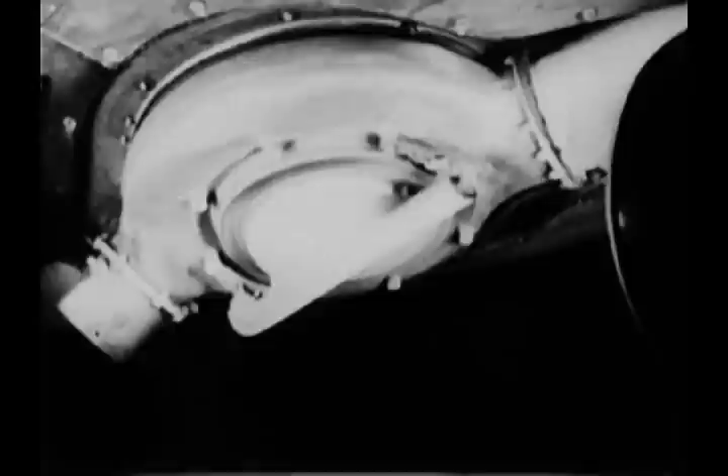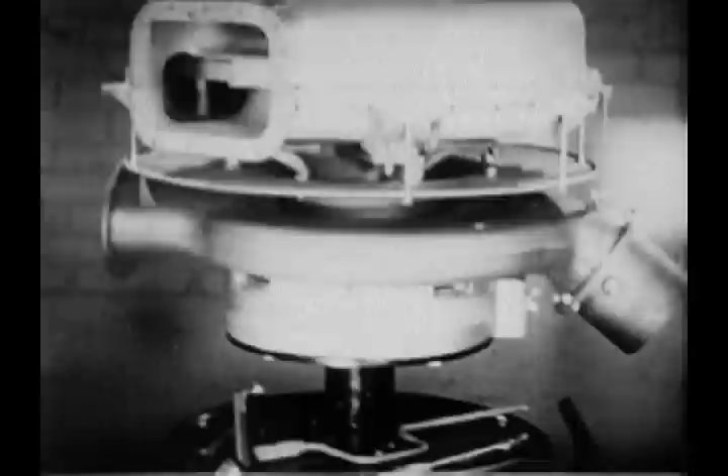This master of the skies, the dynamic turbo-supercharger, is the reason for our air superiority at high altitudes. For the year 1941, the Collier Trophy, one of the highest honors in aeronautics, was awarded jointly to Dr. Sanford A. Moss and the Army Air Forces for 25 years of collaboration in perfecting the turbo-supercharger, which is playing a leading role in sweeping our enemies to defeat.

The turbo-supercharger makes possible high-altitude flying with full engine power. An airplane engine derives its power from explosions of a mixture of air and gasoline. At altitudes above sea level, the air gets thinner and thinner. Therefore, these explosions get weaker and weaker. At 20,000 feet, an unsupercharged airplane engine gives but one-half its normal power. At 35,000 feet, only a quarter of its power.

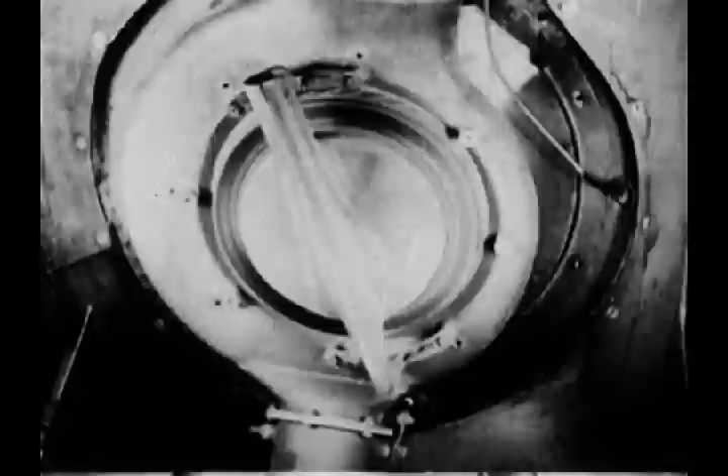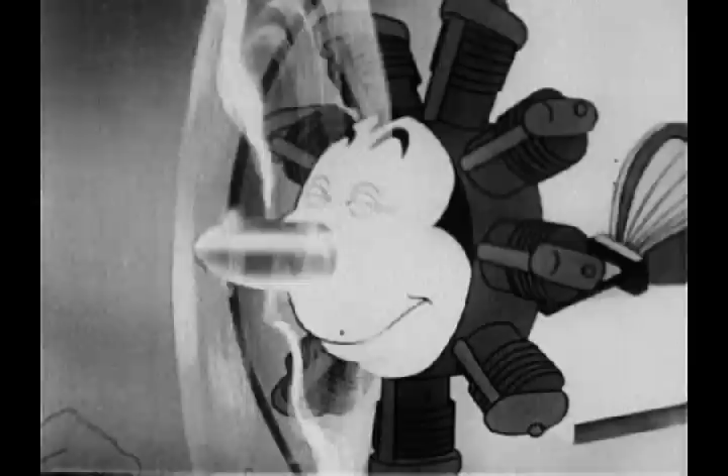The turbo-supercharger counteracts this loss of power by compressing and cramming air into the engine, thereby maintaining proper manifold pressure to give full power at high altitude. It performs the same service for engines that oxygen equipment performs for pilots, kidding the engine into thinking it is always working at sea level.

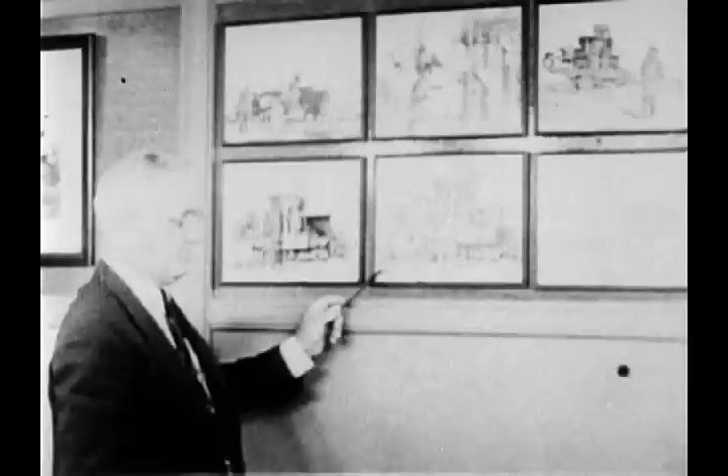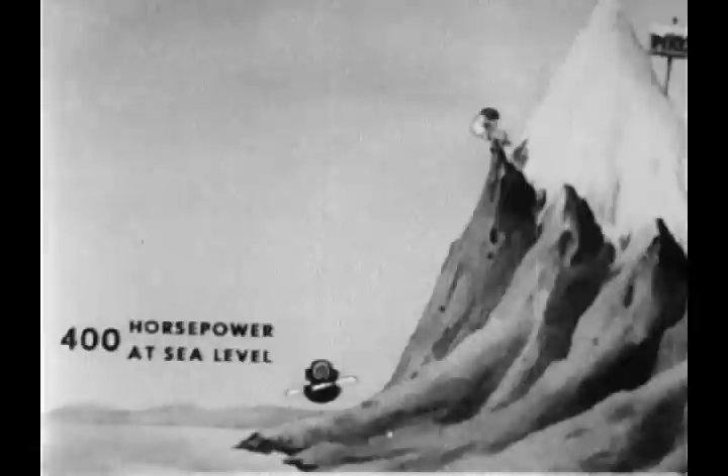Without a turbo-supercharger, the engine gasps for breath. During World War I, the first model turbo-supercharger was tested under great difficulty, on a truck at the summit of Pikes Peak, 14,100 feet above sea level. The Liberty engine developed 400 horsepower at sea level, but moving up

to 14,000 feet, it dropped to 265 horsepower. Then the turbo-supercharger not only boosted it up to 400 horsepower, but to 410, or 10 more than normal at sea level. The turbo-supercharger has demonstrated its worth in actual combat all over the globe.

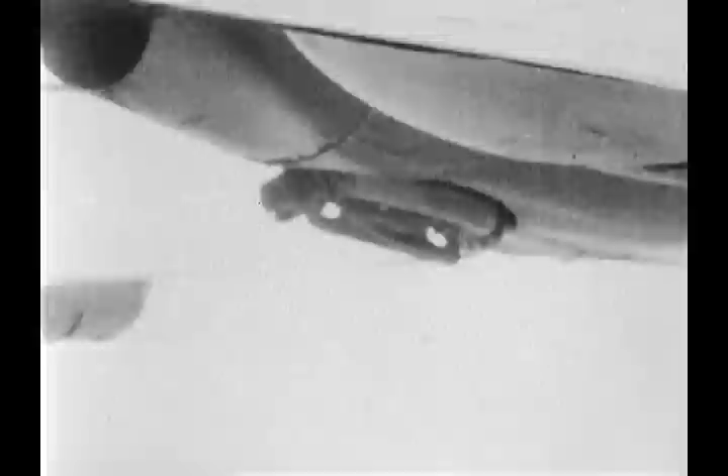Our great bombers, the Boeing B-17 Flying Fortress and Consolidated B-24 Liberator, together with the Lockheed P-38 Interceptor, the P-43 Lancer, and the deadly Republic P-47 Thunderbolt, are all turbo-supercharger equipped, which enables them to fly and fight effectively at great heights above the earth.

Our turbo-supercharged interceptors and pursuit planes can get on top and stay on top of anything the enemy has to offer. These tactical advantages are the key to air supremacy and ultimate victory.

Turbo-superchargers permit our bomber pilots to avoid bad weather, even storms, by climbing over them, making it possible to fly at altitudes and speeds which result in maximum engine efficiency.

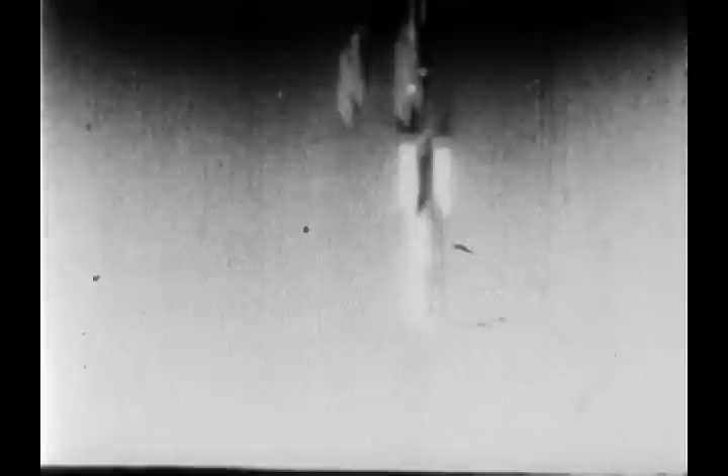Obviously, we have a decided edge when we can bomb the enemy with a minimum of danger to our planes and personnel. Flying turbo-supercharged planes, our boys have bombed enemy objectives with amazing accuracy from heights where they were invisible and unheard from the ground. There had been no warning sirens, no opportunity to take shelter, only the sudden scream and paralyzing crash of falling out of a clear sky.

Almost without exception, these planes have returned safely from their mission. Time after time, you have read of our big bombers returning unscratched from perilous raids in all theaters of the war. It is true that our heavy bombers have been in dogfights, have suffered casualties in men and planes, but in practically every instance, this has happened when planes were operating at levels below 25,000 feet.

Another reason we have to get up higher and higher is to get above the effective range of anti-aircraft fire, which has been reported even above 30,000 feet.

All combat planes are equipped with gear-driven superchargers, which are built into the engines and driven from the engine crankshaft. These geared superchargers are effective up to medium altitude. At high altitude, the turbo-supercharger is needed to provide additional pressure to maintain full engine power.

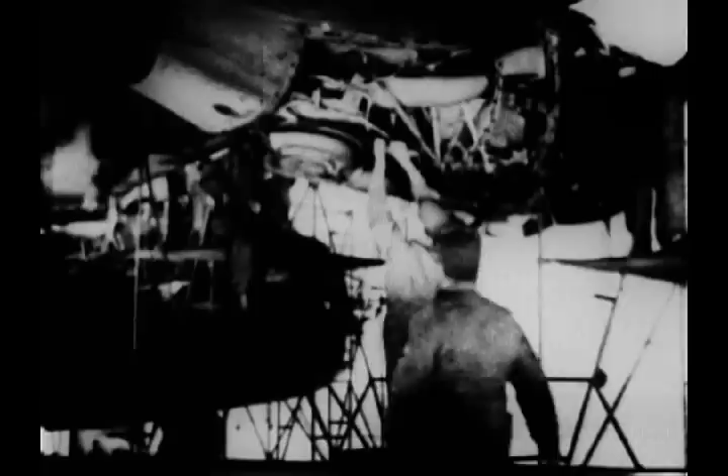With proper care in installation, maintenance, and operation, the turbo-supercharger is extremely effective, reaching its full power and efficiency at 25,000 feet or higher.

This is the turbo-supercharger installation in the B-17. Installations vary according to the different types of ships, such as the B-24, the P-38, the P-43, and the P-47, where it is submerged in the fuselage.

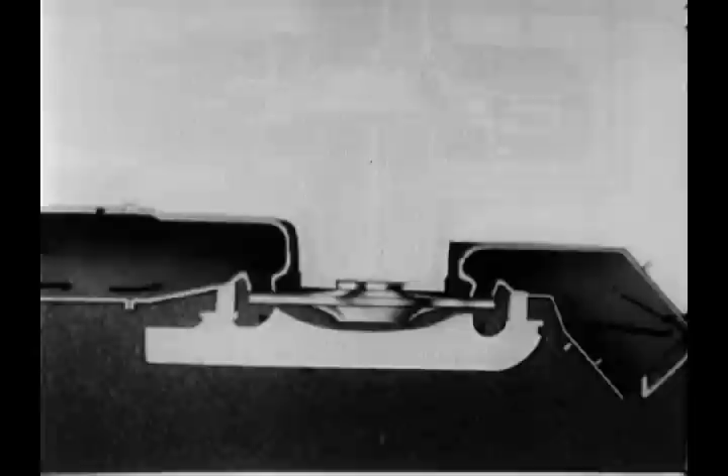A turbo-supercharger is driven by the terrific impulse of hot exhaust gases from the engine. It largely uses waste power. Waste exhaust gases pour into the nozzle box, where they are directed onto a metal windmill or turbine wheel at 1,500 degrees Fahrenheit, with all the red-hot energy that implies. This blazing force spins the turbine wheel at terrific speeds, up to about 20,000 revolutions per minute.

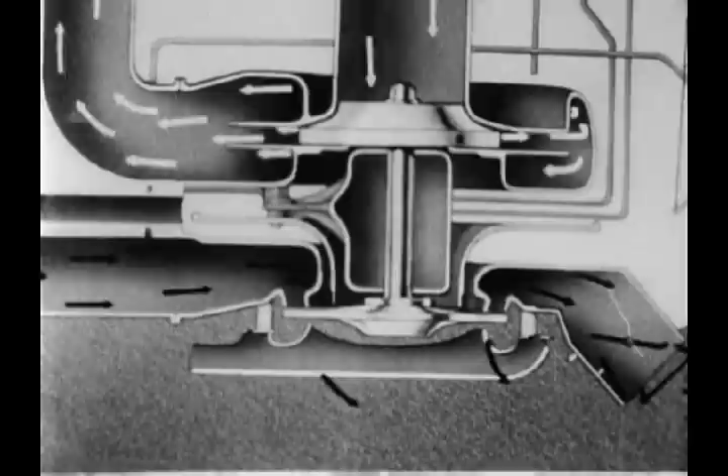The turbo-supercharger stands the gaff of almost impossible high-speed strains and stresses, and still performs its task at temperatures ranging from 1,500 degrees above to about 67 degrees below zero Fahrenheit.

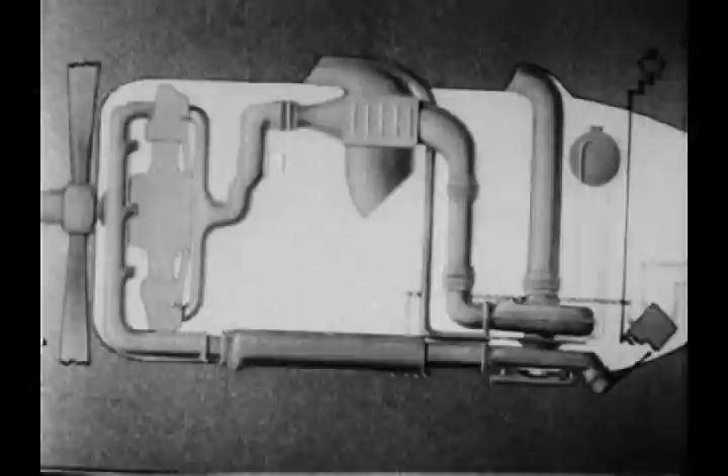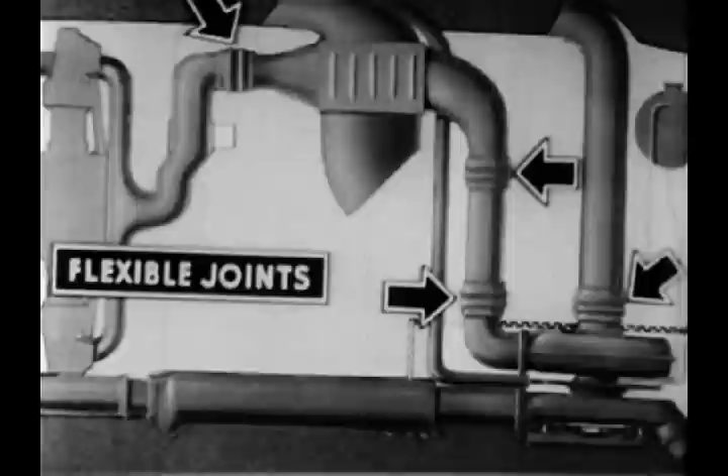The basic principle of all turbo-supercharger installations is outlined in this diagrammatic drawing. Flexible joints are installed between the component parts to absorb vibration. For purposes of clarity, we will divide the system into 5 parts: 1, the induction system. 2, the exhaust system.

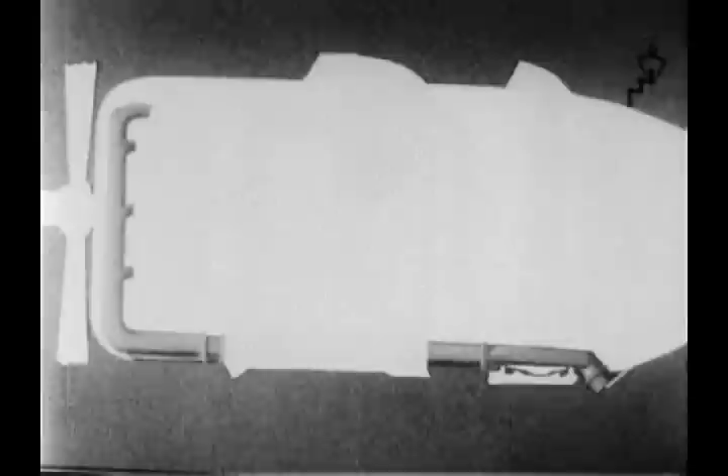3, the ventilating or cooling system. 4, the control system. And 5, the lubrication system. Individual installations vary according to the different design of ships, but their functions remain the same.

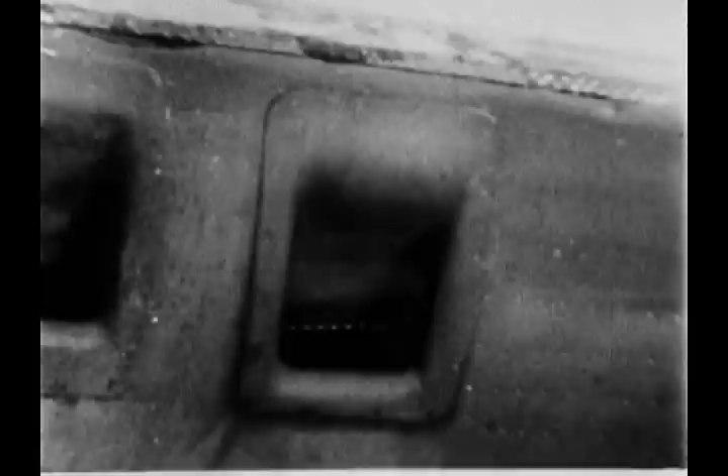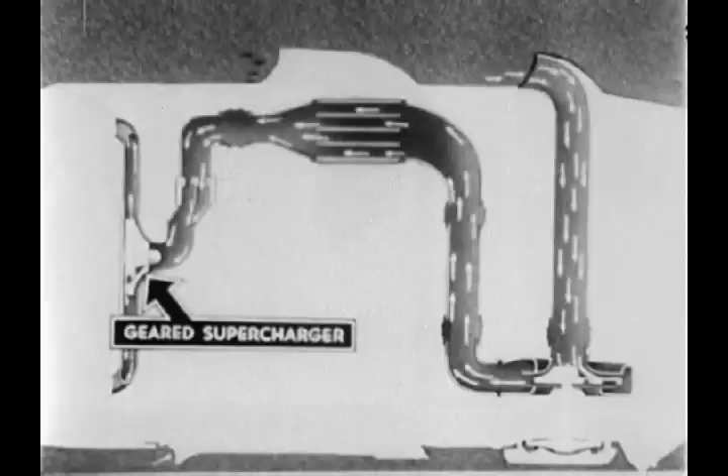The induction system comprises rammed air intake in the engine nacelle or in the leading edge of the wing. The speed of the plane rams air into these intakes and assists in keeping up pressure. Ducts carry this air to the compressor, where it is compressed and forced through the intercooler, and the carburetor to the inlet of the geared supercharger. The geared supercharger is used to do part of the required supercharging and to improve the distribution of the fuel charge to the cylinders.

The exhaust system takes the high-temperature exhaust gases from the engine to the turbine wheels or out through the wastegate to the atmosphere. The cooling or ventilating system cools the supercharger parts, thus preventing damage due to the high-temperature exhaust gas.

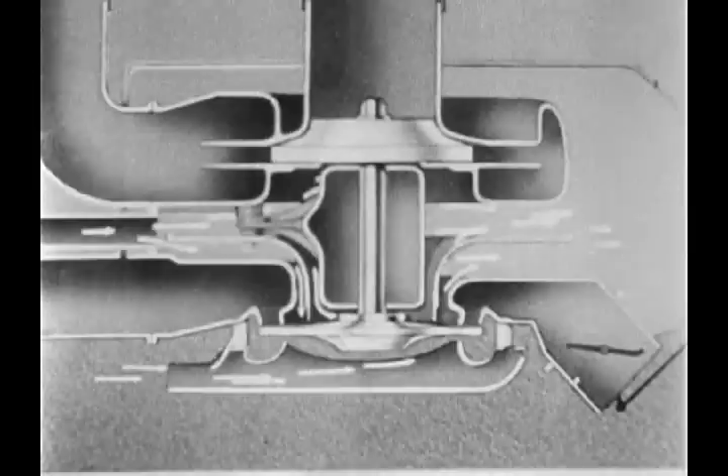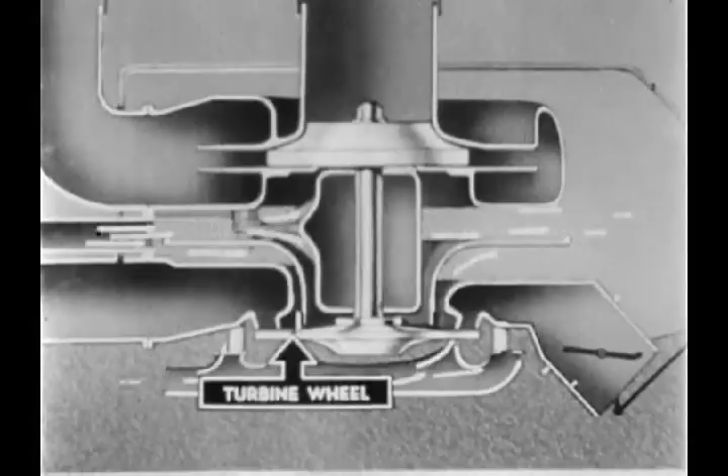Rammed air is carried through ducts to the turbo, where the stream is split by the baffle plate, and cool air is forced against the bearing housing, compressor casing, the back of the turbine nozzle box, and the back of the turbine wheel. Other ducts perform the same functions in relation to the exhaust stack shroud, which insulates the exhaust stack, and the air intercooler, which for proper combustion reduces the temperature of the air fed from the compressor to the engine. The intercooler cools air in the same way the radiator on your car cools water.

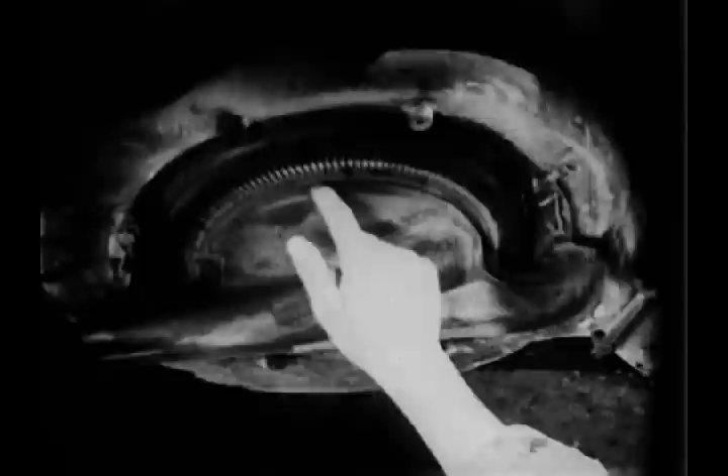The cooling cap supplies air to the rim of the turbine wheel to lower the temperature of the wheel disc.

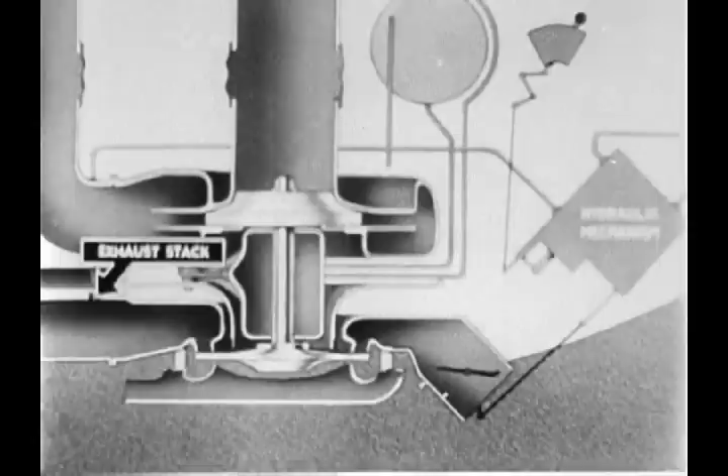The turbo-supercharger is controlled by a hydraulic regulator, which operates the wastegate in response to pressure changes in the exhaust stack. The wastegate control is adjusted by a boost lever in the cockpit.

The wastegate controls the speed of the supercharger by bypassing the gases around the wheel. With the wastegate open, the turbine will idle. Closing it by degrees enables the turbo-supercharger to operate at required speed.

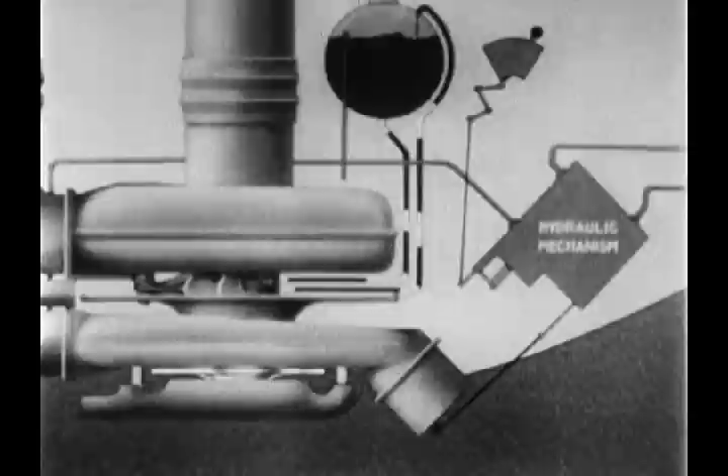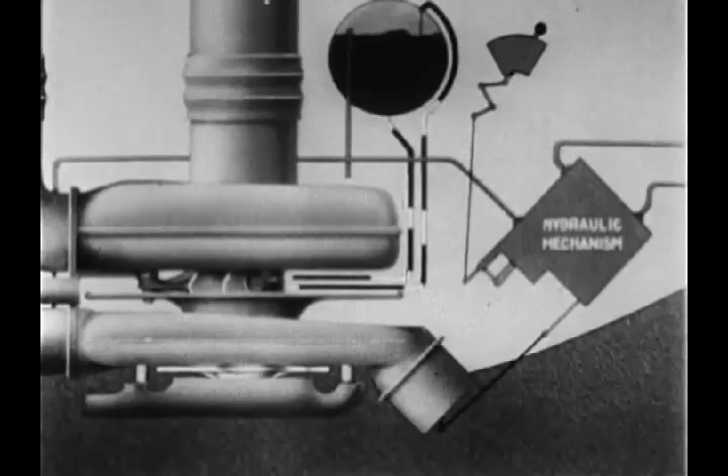Lubrication is accomplished by a gear-driven pump. One element of the pump takes oil from the tank and supplies it under pressure to the moving parts. The second, or scavenging element, returns the oil to the tank.

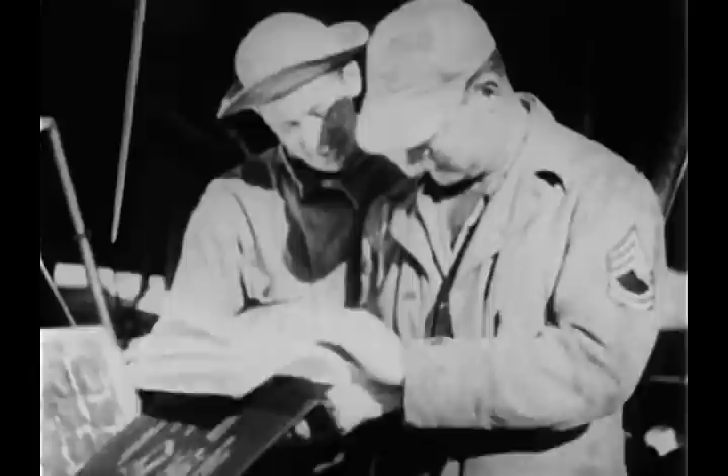When a ship comes in from a long, grueling flight, or even a routine operation, the pilot knows that the ground crew will assure the success of his next mission by a thorough inspection. The inspection of the turbo-supercharger installation is performed in accordance with Army Air Forces technical orders.

Air ducts running from nacelles or from the leading edge of the wing must be kept clear at all times. A piece of newspaper in a ram air duct will choke off cooling air, which is absolutely necessary for proper performance. Men are sometimes careless and step on louvers, blocking the flow of ventilating air. Ducting must be examined for broken connections, cracking, and chafing.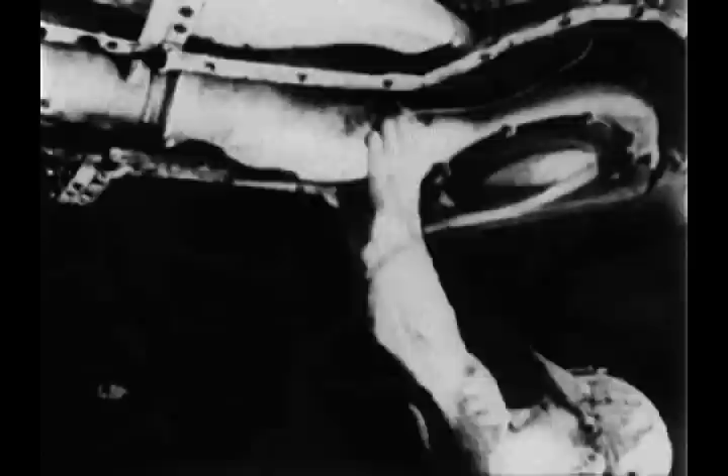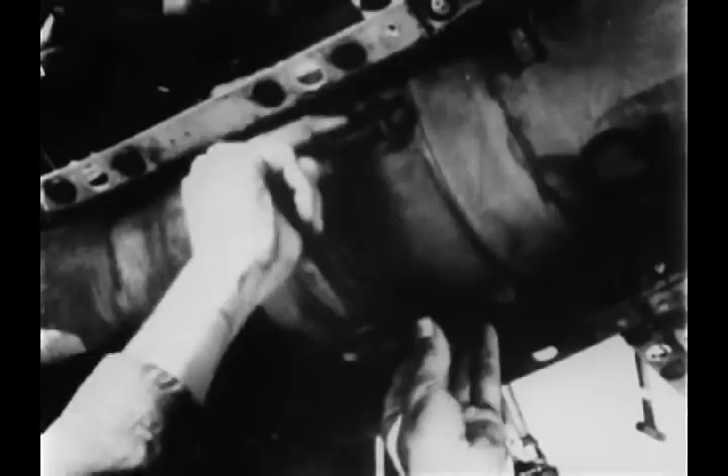The exhaust system is equally as important as the air feed. All joints in the exhaust system must be inspected for gas leakage, with special attention to flexible joints. Look for signs of overheating and leaks around exhaust piping. One small leak might rob the engine of that vital extra few miles an hour which marks the difference between victory and disaster. Leakage can be detected when the engine is started.

In the lubricating system, check oil level in the tank. Keep all foreign matter out of oil. Note and record excessive oil consumption. Keep oil tank vent clear. Report signs of oil foaming or mist. Inspect all pipelines and connections, including turbo-supercharger regulator, for oil leakage and security.

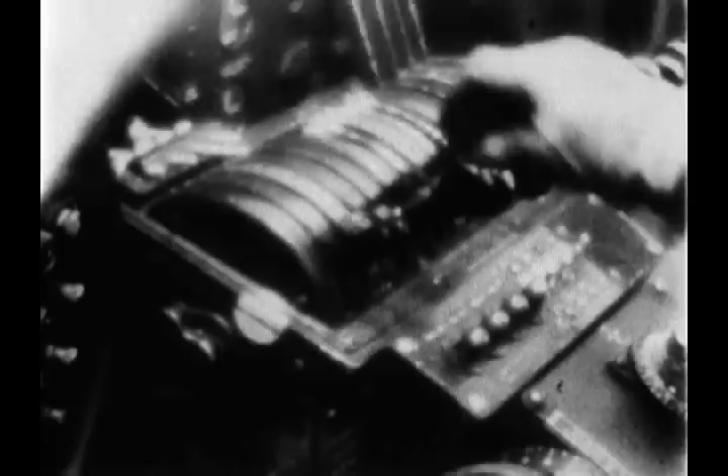When inspecting the control system, check free movement of regulator in relation to open and closed positions of wastegate. Check free movement of boost control in cockpit. Be sure turbo regulator locking device operates correctly.

The pressure regulating pipe should be disconnected at both exhaust manifold and regulator. Blow air through and record any water condensation, carbon or other foreign matter. Water will freeze and foreign matter clog the pipe. Test pipe to make sure there is no leakage.

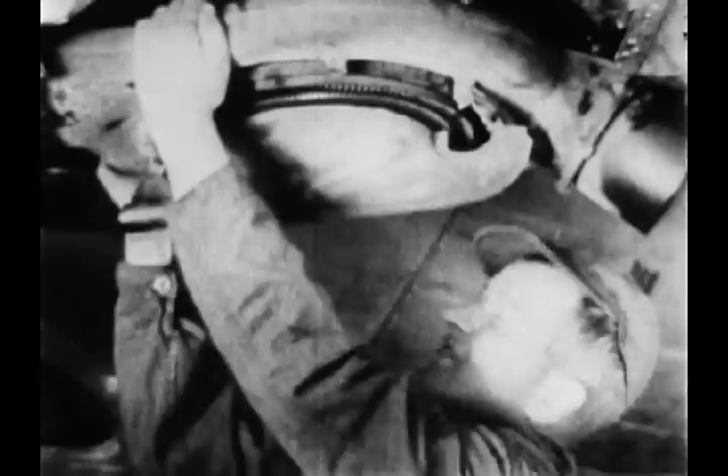See that regulating pipe orifice in exhaust manifold is free from carbon or corrosion. Inspect turbo-supercharger to see that it is firmly in place. Inspect nozzle box for deformation or cracking.

Turn turbine wheel by hand, feeling for any obstructions or tight spots. Listen closely for strange noises or rubbing, which might be caused by foreign matter on the back of the wheel. Examine the wheel for signs of overheating.

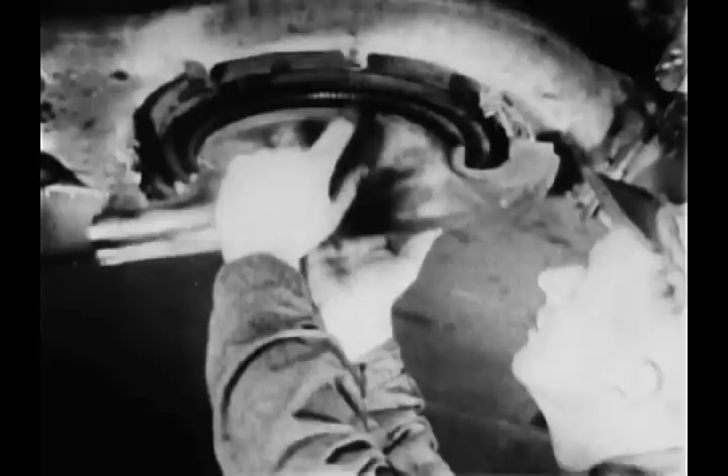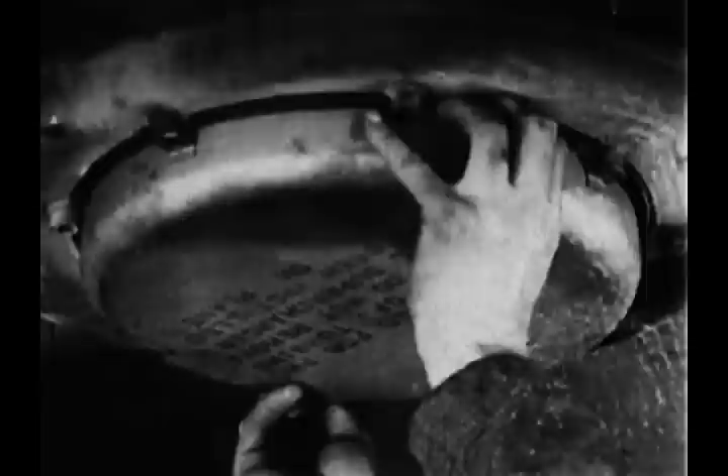Inspect bucket for alignment and deformation. The cooling cap is always taken off and is replaced by a cover cap to protect the turbine wheel. The turbo-supercharger is carefully lowered from the plane and starts its journey to the overhaul depot.

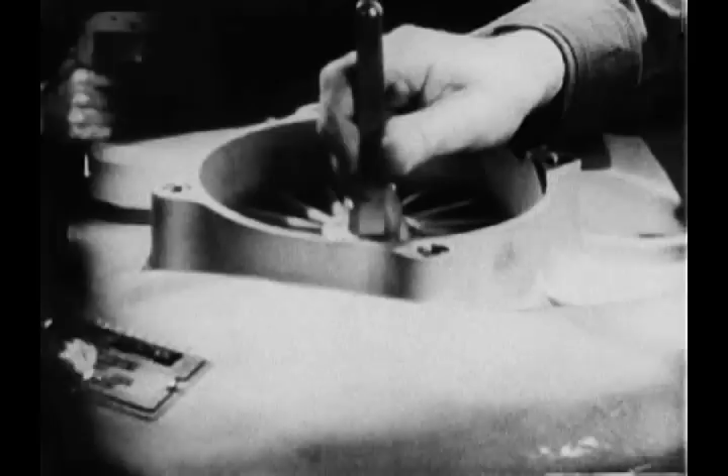At the depot, the supercharger is placed wheel down on a special stand for disassembly. After proper clearances are taken, the rear compressor casing and gasket are removed, revealing the impeller and diffuser. The impeller is on the same shaft as the turbine wheel and discharges air through the diffuser to the compressor casing, which collects the compressed air and feeds it to the engine.

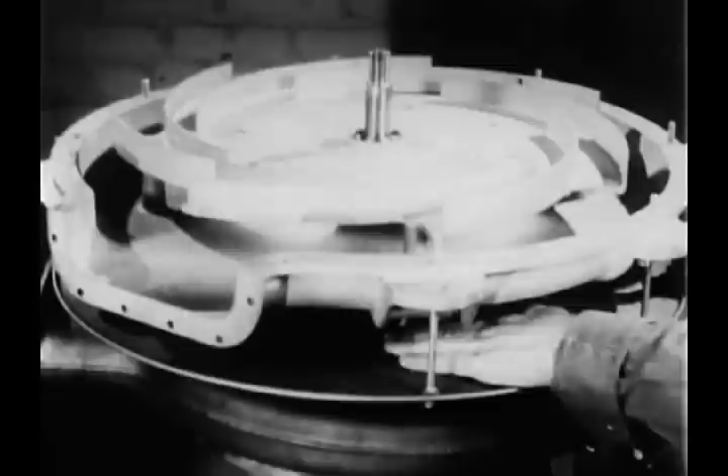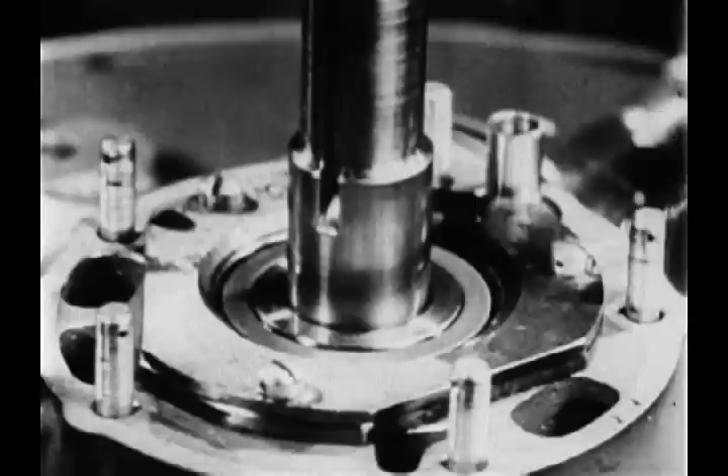After removing the impeller, the front compressor casing and diffuser are taken off as a unit. Note that we are working from rear to front, as the turbine wheel side is always called the front, regardless of position. This disassembly appears very simple. Actually, it is a long and careful process, which we will demonstrate by the more detailed removal of the rear bearing and its housing. Safety wires are cut and the 3 retaining screws taken out.

The rear bearing clamp washer is lifted off and the same 3 retaining screws inserted in the threaded jacking holes in the flange of the rear bearing housing. Each of the 3 screws is turned a little at a time, one after another, thus evenly jacking out the rear bearing and housing. The rear bearing is a ball bearing.

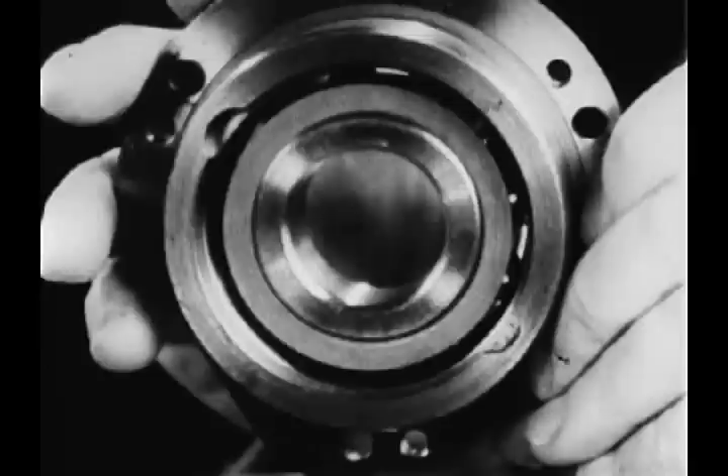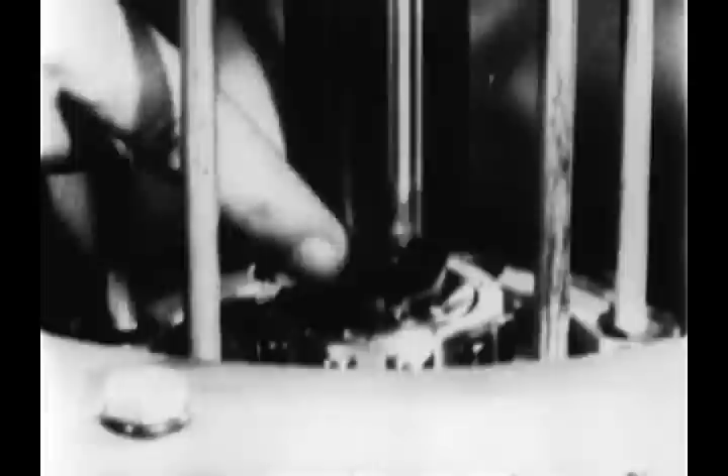Next, the bearing and pump casing is removed. The oil pump is operated by this drive sleeve, which is locked onto the shaft with the Woodruff key. Then the front bearing, which is a roller bearing, is removed.

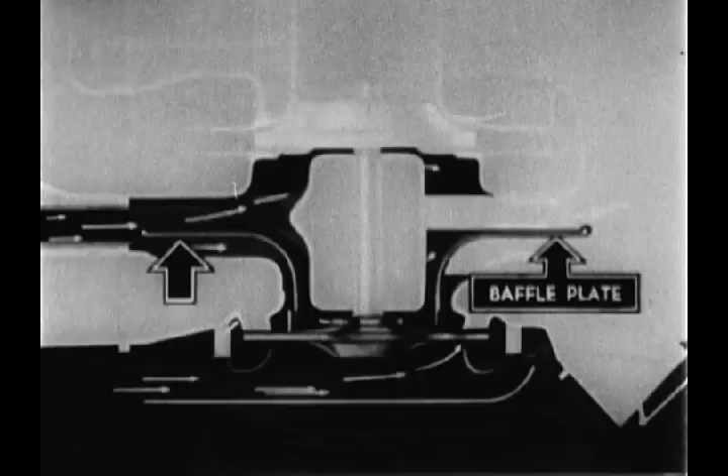The baffle plate is a radiation shield and also divides and directs ram cooling air against the bearing and pump casing, front compressor casing, the back of the turbine nozzle box, and the back of the turbine wheel.

A series of blades in the nozzle box directs the high temperature exhaust gases onto the buckets of the turbine wheel. These buckets are separate blades driven into slots in the wheel.

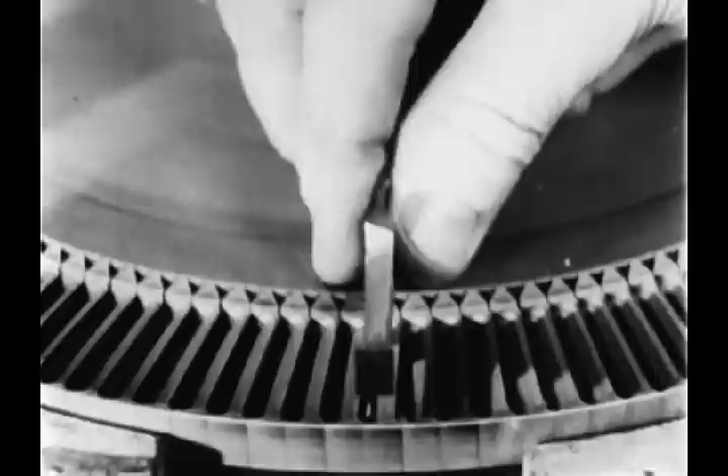During disassembly, 5 clearances are taken: 1, annulus. 2, blade side of impeller to rear compressor casing. 3, plain side of impeller to front compressor casing. 4, pump backlash. 5, between turbine wheel and nozzle box.

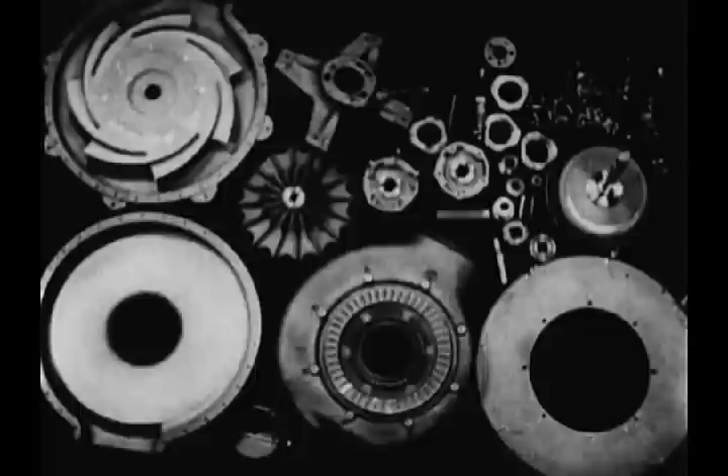Here are all the parts of a turbo-supercharger. The disassembly you have just seen in a minute or two actually takes a skilled mechanic several hours.

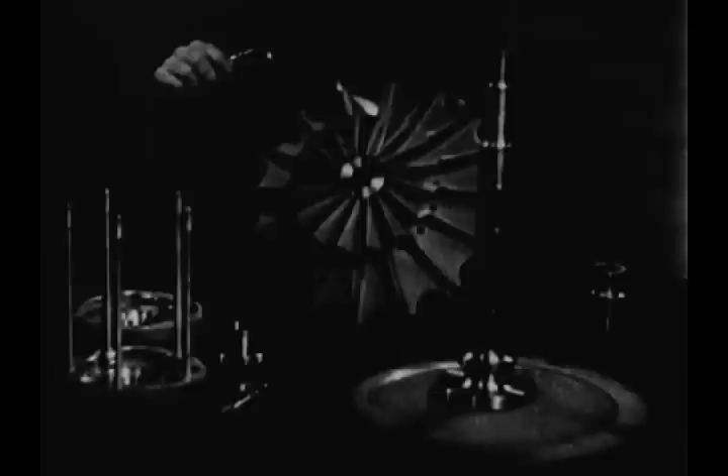After disassembly, careful inspection is made of all parts to determine those which are to be repaired or replaced. One of the most precise repair processes is proper balancing of the rotor unit. This balancing is necessitated by even minute differences in the parts as placed on rotor assembly.

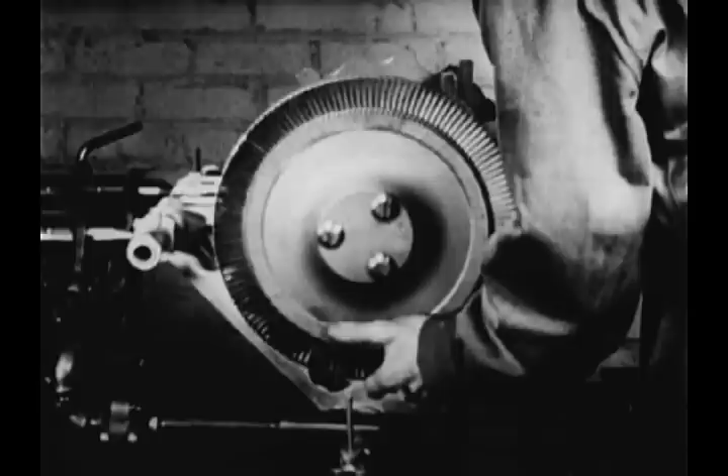The rotor unit is placed on the balancing stand where it is dynamically balanced. Running at speeds in excess of 20,000 RPM and in any position which the plane flies calls for more delicate balancing than a fine watch.

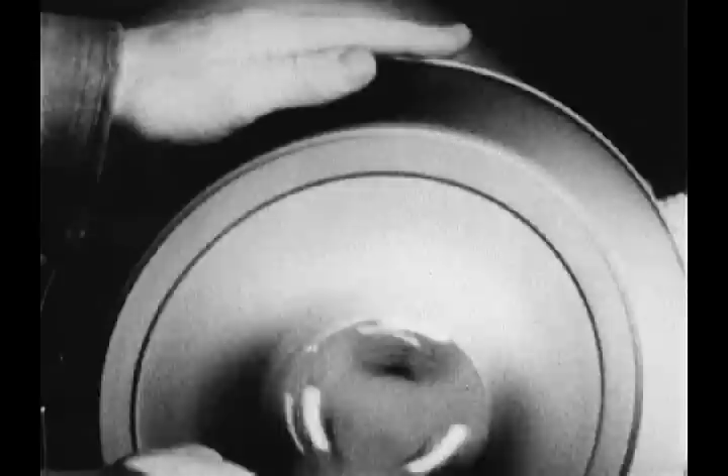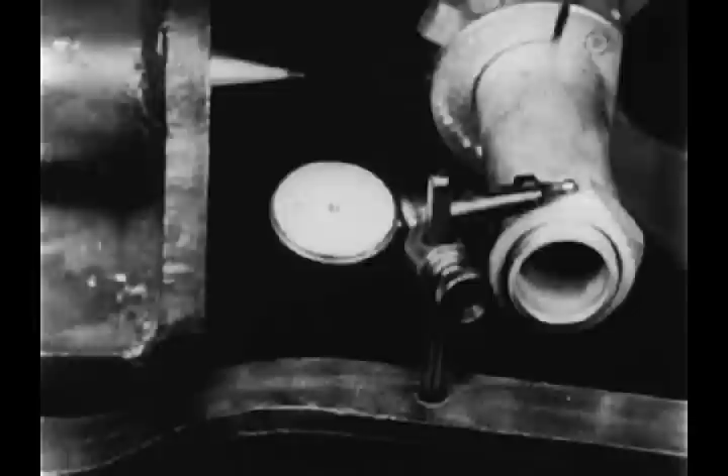A daub of clay is placed on the wheel, then shifted to find the point at which vibration becomes negligible. Then, from the diametrically opposite side of the wheel, enough metal is removed to offset the weight of the clay.

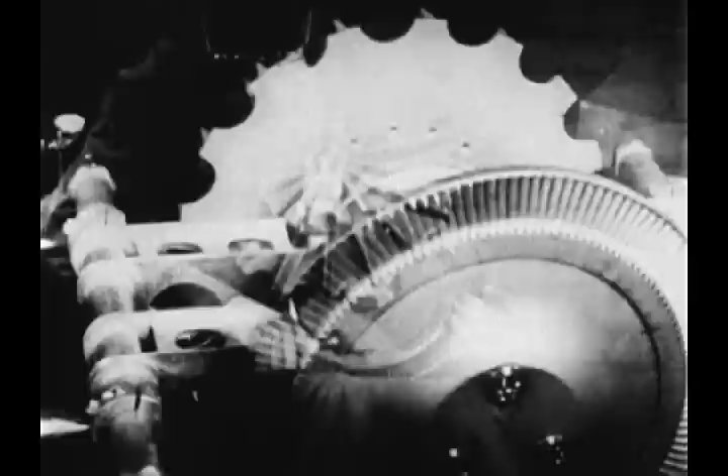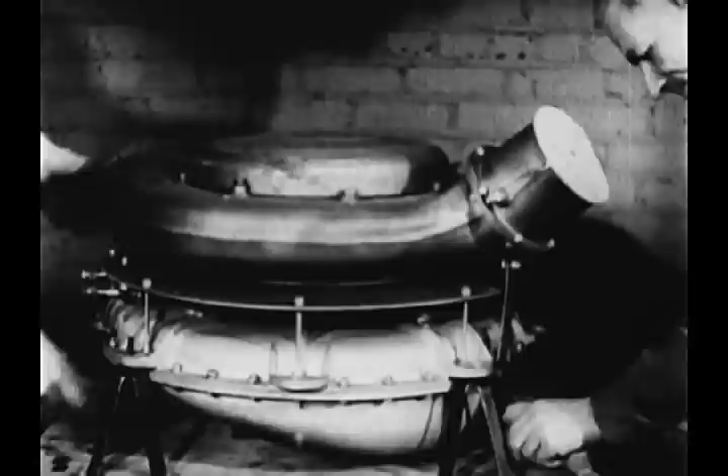The same balancing procedure is used on the impeller end of the rotor unit, and enough metal is removed to balance the impeller. After balancing of rotor and assembly of supercharger, it is ready to be returned to the flying field.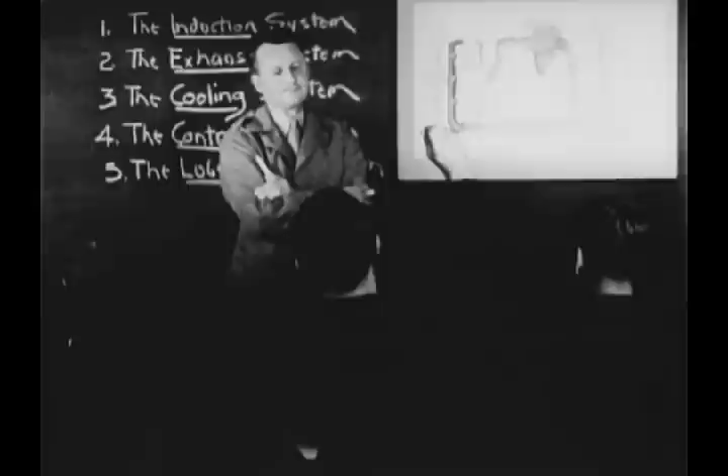Like every other part of a modern military airplane, the turbo-supercharger must be understood by pilots who should remember important instructions regarding controls. Before starting the engines, be sure that the turbo-supercharger is in the off position.

No provision is normally made to supply engine air except through the turbo, its ducting, and intercoolers. Therefore, considerable resistance will be imposed on airflow to the engine when the turbo regulator is in the off position.

In order to obtain sufficient manifold pressure for takeoff power, it is necessary on some airplanes to use a small amount of turbo boost. Close the wastegate a little.

Tactical requirements may dictate using military rated power for a period not exceeding 5 minutes. Climbs are usually made with about normal rated power.

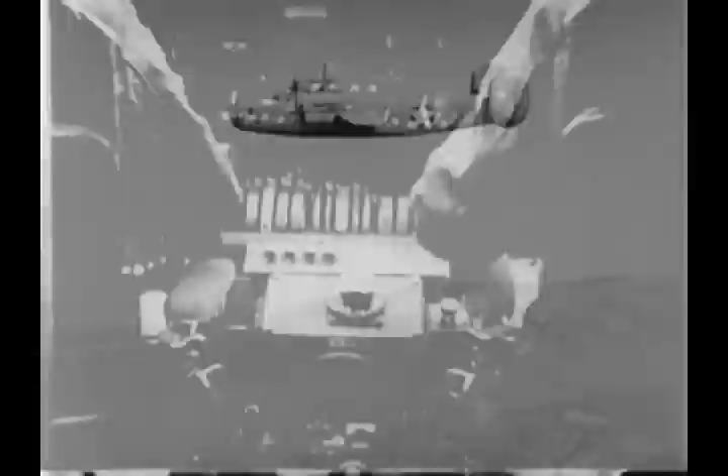Small adjustment of the turbo control may be necessary during climb to keep manifold pressure at the desired level. For low altitude, low power cruising, when the geared supercharger is enough to provide proper manifold pressure, reduce engine throttle to maintain the desired manifold pressure.

At high altitudes of more than 20,000 feet, it is not practicable to operate at very low engine speeds and power. Turbo superchargers should be kept engaged at all times when induction system icing may be encountered.

Above approximately 25,000 feet, manifold pressure should be reduced in accordance with the instructions given for each type of plane, to avoid overspeeding the turbo supercharger.

For gliding and approach for landing, the turbo regulator is set approximately at maximum cruise position to ensure power to go around the field again if necessary.

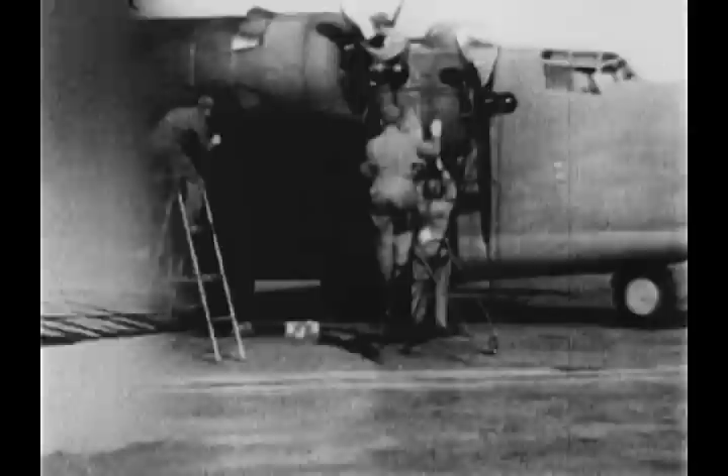The performance of ships equipped with turbo superchargers is a matter of teamwork between ground crews and pilots. It is not necessary for a pilot to learn all the mechanical details of construction, but it is wanted that he know what he can expect from a turbo supercharger when he needs its assistance to win the fight, save the lives of his crew and himself.

The men who fly these powerful planes are going to depend upon their turbo superchargers in emergencies which will test all their skill, strength, and courage.

Operation and control are largely automatic, but there are certain times when the pilot needs power and needs it instantly. These times occur under stress of actual combat conditions, and his reaction should be instinctive.

The pilot will depend upon this master of the skies to give him the edge of speed and maneuverability, which means the difference between defeat and victory in the substratosphere regions of the sky.

It is with enormous pride in American scientific invention and mechanical ability we look at our interceptors and pursuits, which can get on top of anything that flies.

It is with a feeling of grim satisfaction that we know our bombers are able to shoot down or escape from anything the enemy can put in the air.

This edge is held only as long as the turbo-superchargers on each and every one of these planes is kept at the peak of performance.

They must answer every demand that the pilot makes. It's up to the ground crews to keep them flying, and flying higher and higher. Ride the master of the skies to victory.